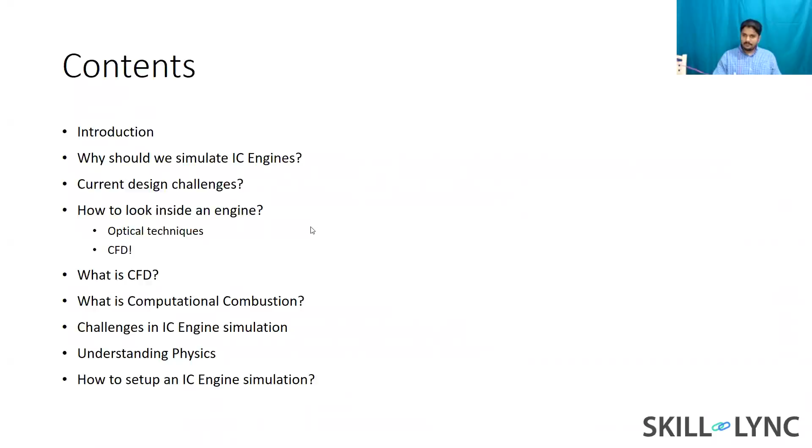So why is IC engine simulation required? Well, partly because IC engines produce emissions and they're not that efficient. So why are IC engine simulations required then? Why is that a solution? Well, IC engines are a device that have been existing for a while, correct?

Let me just get my microphone closer so that you guys can hear me. Like I said, IC engines are a device that have been existing for a while. So since it's been a while, there are a lot of engineers like you who have tried to optimize this system before and succeeded. Previously, this type of success could be attributed to very simple calculations. A very simple example is that the thermal efficiency of an engine is proportional to the compression ratio. I'm pretty sure you've all studied the Otto cycle, where there's a formula: 1 minus 1 by R power gamma minus 1. You don't have to know this formula, but basically the idea is when your compression ratio increases, your thermal efficiency increases, correct?

In fact, the variable compression ratio technique is completely based on that simple formula. I'm pretty sure you guys know there is a new technology called variable compression ratio. Though the concept is very easy and can be derived on a piece of paper, it's only been implemented right now.

There are a lot of other technologies which have been implemented, or are in the process of being implemented. These type of analytical work can take us far, but not really, really far. At some point you need a better vision, you need to see inside an engine. For that there are experimental techniques, but as I will show you, there are some bottlenecks to it.

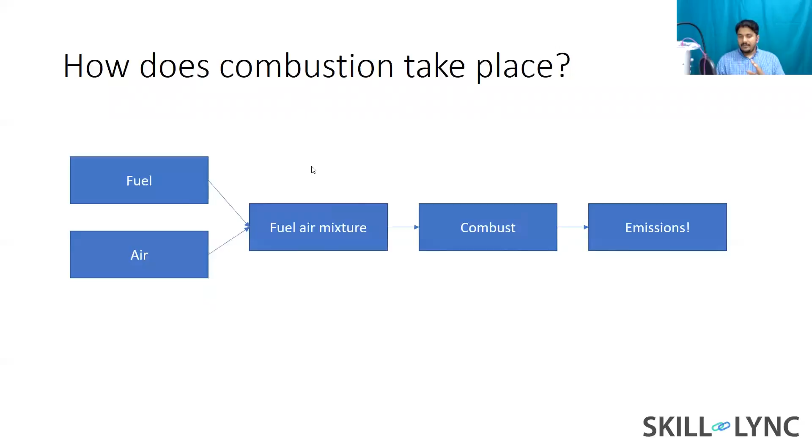In the simplified diagram, if you're able to optimize even a single system - meaning, for example, if you're able to optimize the process of creating fuel air mixture - that means you're taking a step forward towards optimizing an IC engine. I hope that makes sense.

For example, if you make the mixing process more efficient, you can get advantages in reducing emissions and gaining performance improvements. But what does making the mixing process more efficient even mean? Can anyone answer that question? How can you make the mixing process more efficient? What are some of the technologies currently available? Can anyone answer, please? It's a very simple question, so I'm hoping all of you can answer.

ECU, electronic control unit - how does it make the mixing process more efficient, Nirav? Fuel injection, okay that's good. Fuel injection definitely makes the mixing process more efficient because it helps in better atomization of the fuel. Harshit says more air and less fuel maybe? Not really, right - we're talking about the mixture, so even if your fuel amount or air amount changes, mixing is completely different.

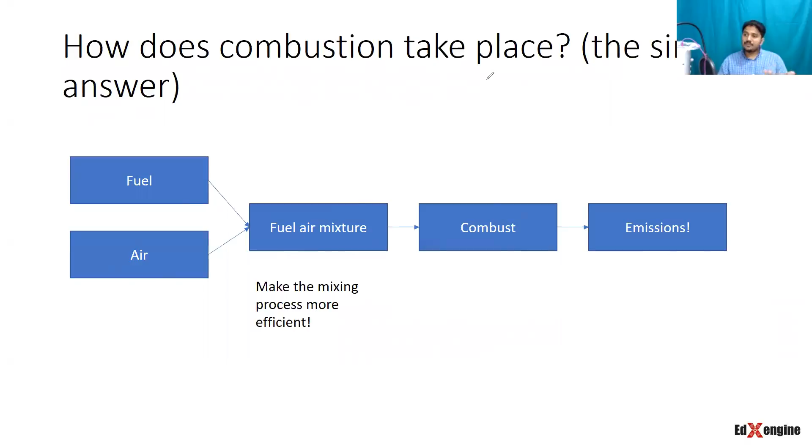Similarly with combustion, if you're able to make the combustion more efficient, then things will be better. But that's the question, right? Whenever you're talking about making things efficient, you always need to engineer the problem.

For example, say you're working with some type of system and you're trying to optimize it. The question is, when you're trying to optimize it, you need a performance metric. Say you're designing a vehicle and trying to optimize your suspension system. You can tighten the springs, modify your dampers, change your camber, caster, toe-in, toe-out, all that stuff.

But how would you measure the performance of the vehicle? There has to be a particular metric. What would that metric be? How fast can I complete a particular lap? That is a metric. So the metric you're looking for is time, correct? Time to finish a particular race.

But how do you put a metric for combustion efficiency? Can anyone answer that question? Neerav Vyas says, what controls this injection port? Neerav, maybe try to rephrase your question, type in a longer answer.

Harshit says compression ratio is a geometric quantity, right? Because it is a geometric parameter, it is just the ratio of volumes. How does that make your combustion more efficient? When we're talking about efficiency, isn't there something like 50% efficiency, 60% efficiency? How do you measure that?

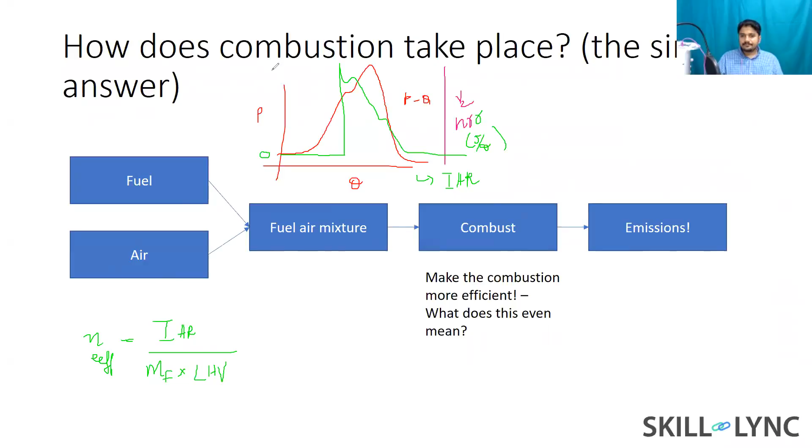All right, finally we have emissions. Emissions is basically something that is controlled by chemical reactions, and a sound understanding of chemical kinetics is required in order to completely understand how your reactants, which is air and fuel, are converted to products.

All right, so now the previous diagram, as I mentioned, is a simplified diagram. So now let's kind of build upon it, add more layers to it, to understand a much more detailed and complex picture of the IC engine combustion process.

So first, you need to make sure you have your fuel components, vaporization characteristics, and physical properties. Why is that important? You need to understand your fuel - for example, say you go to your petrol bank today, it is made up of thousands of species. What do I mean by species? Well, that refers to hydrocarbons like octane, alkenes, alkynes, and benzenes.

Aromatics - so your fuel is made up of all of these components. It is very important to understand what your fuel is made up of, because each component will vaporize at its own rate, which is what you call the distillation curve. So very similar to fractional distillation - you guys might have studied that concept. Basically, in fractional distillation, different hydrocarbons settle down at different heights because of differences in their vaporization characteristics. The same concept applies to your ordinary fuel as well.

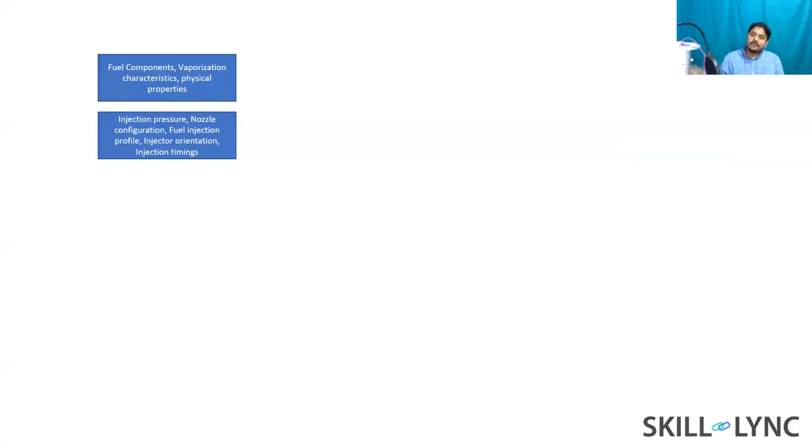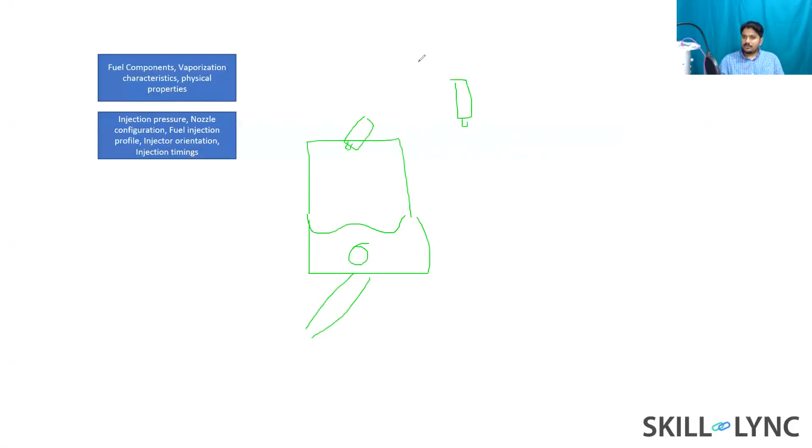Say you have an injector and you have to place the injector. For example, if this is your engine and say this is your piston bowl, okay, and this right here is your piston, and I have my connecting rod here. Say that you have a fuel injector - now, would the fuel injector be placed like this? Or would the fuel injector be placed like this? What is the right way? Can anyone answer this question? How do I decide which way I want my injector to be placed? Red one, why? Why is that?

So these are very practical questions that you can think about. The answer is, the fuel doesn't impinge on the wall. Well, in this case, don't you think the fuel is directly going to impinge because this is the shortest distance? Isn't the diagonal larger?

Ivanshu, what do you think about that? Mayank Yadav says it distributes in a better way. How are you saying that? The green one, as it will cover more area with the air inlet. Well, so that's the thing, right?

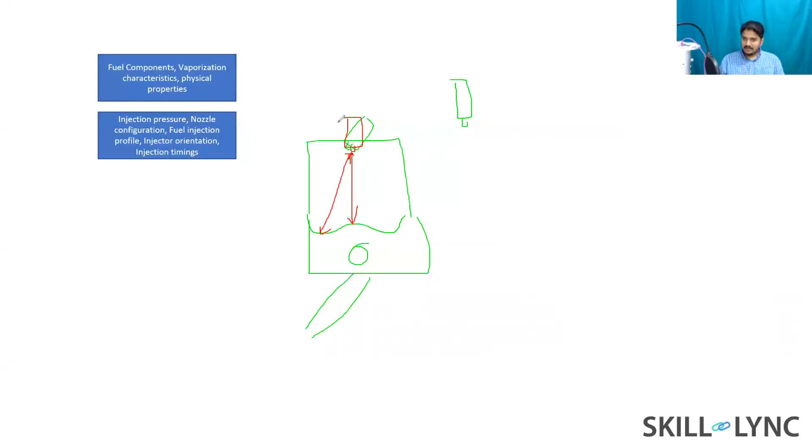So it depends on a lot of factors, right? If you think about it, the port design is something that you try to optimize. One of the things people do is, for direct injection engines, before the spark starts, your fuel needs to vaporize. How will the fuel vaporize?

Well, if you hit the wall directly, that's it. You forget the vaporization. It's all going to be liquid fuel, and your engine will basically generate a lot of smoke. So what should I do?

Well, I need to reduce the impingement, which means when the spray comes in, I need to make sure that it does not impinge. That is not the only criteria, but my parcels need enough time to basically vaporize, right? Which means, yeah, you can see that this is the longest path. But what I can tell you is, in this type of configuration, if you take the green injector, I can do a couple of things.

What I can do is design my intake port to be something like this, so my intake port and the fuel injector are aligned at the same angle. So if I measure this angle theta, my injector is also aligned along the same angle.

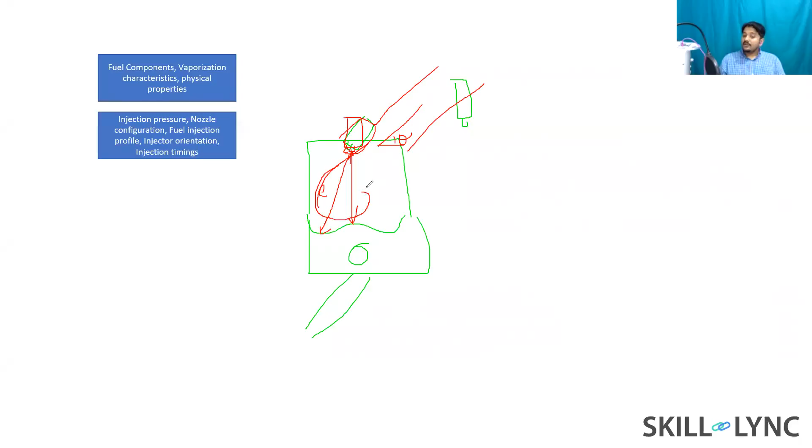So what will happen is, my fuel spray will come like this, and because of the piston shape, the air would force the spray parcels to take this path as much as possible. There is still going to be some impingement, but the bulk of your spray is going to take this path.

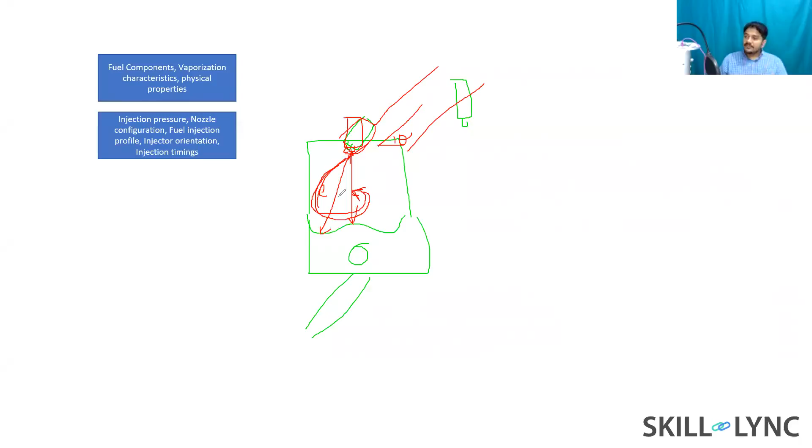And that is where the bowl design is very important. This will help you in atomizing the spray, right? So this is what you call a tumble port.

And this flow, this rotation, you can see that the air has a rotation about the x-axis, where x is pointing normal to the screen. So when you're looking at the screen, the x-axis is pointing towards you. This is basically tumble. So tumble is basically flow about the x-axis or y-axis, assuming the z-axis is the axis of the piston.

So this again, you can see that the concepts are quite simple. But so far, whenever I talk to someone, no one knows what tumble flow is. Hopefully now you can understand that it's a very simple design or flow methodology that you can use to make sure that your fuel doesn't hit the wall directly.

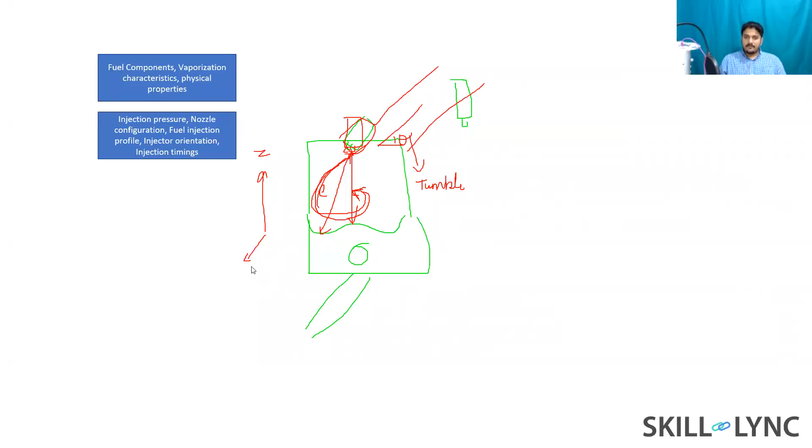Harshit, can you explain again? Yeah, sure, no problem. So what I'm saying is, let me see if I have a video for this. Just a second. I'm just going to stop sharing my screen. I'm going to see if I have my simulation video for this. Else I'll just show it to you.

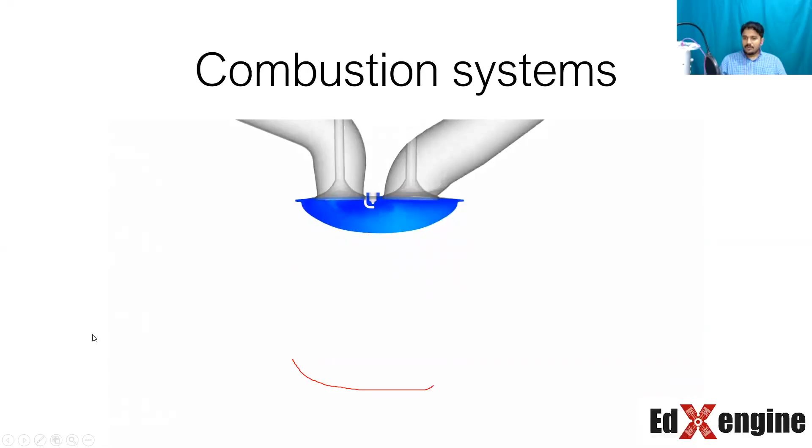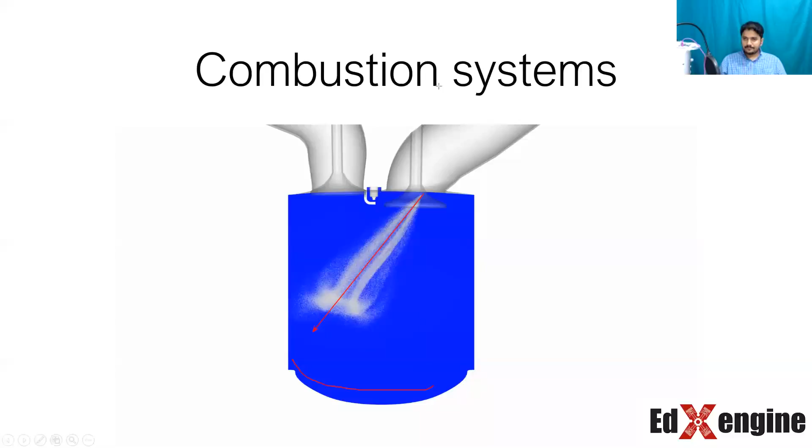It's going to be quite easy to visualize in the next slide, where I'm showing the spray again, but in white color. You can see that the spray comes in, right? So this right here is the axis of the spray. And you can see that my intake port, if I use a different color, kind of has the same angle, almost, not exactly, right?

So what this is going to do is help you turn the flow like this. And that is called tumble.

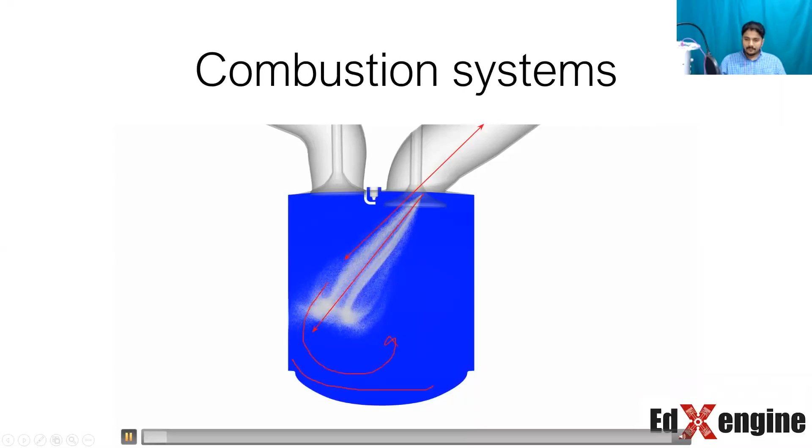So if I play the video again, you can see that it comes in like that, but there's some amount of rotation like this, and all of your spray is vaporized and combustion takes place. So that's your flame front propagating. So this is one of the simulations that we ran.

And I hope Harshit, this kind of clears things up. So this is a tumble port. In this case, the simulation that I ran, this is what you call a tumble port, TP.

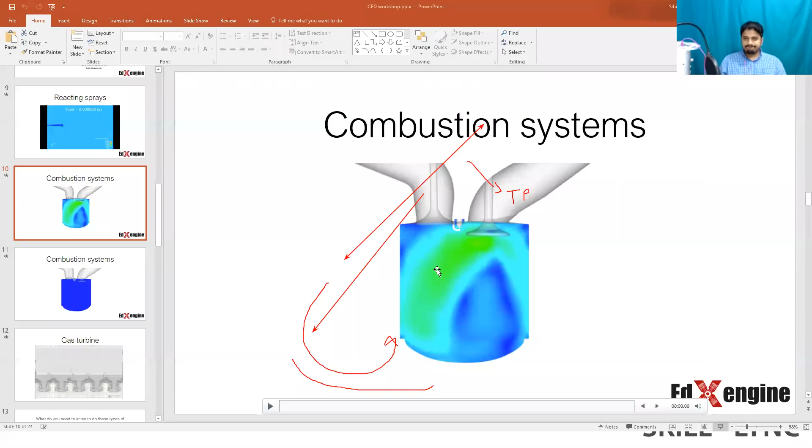So the other thing when we talk about fuel is to talk about the fundamental physics. You need to understand how the fuel vaporizes, how the fuel breaks, because that will help you design your injection systems and your combustion chamber. Your fuel comes in, and the objective is to break it up efficiently and vaporize it as fast as possible, in a controllable, repeatable manner. So you need to spend time understanding the fundamental fluid dynamics of these injected fuel droplets.

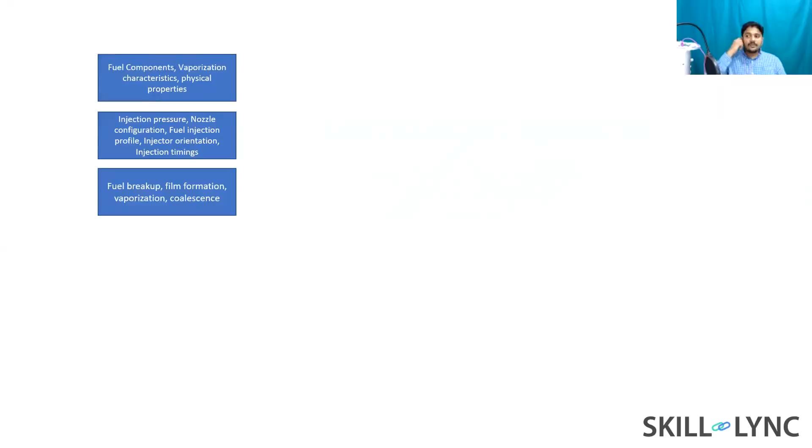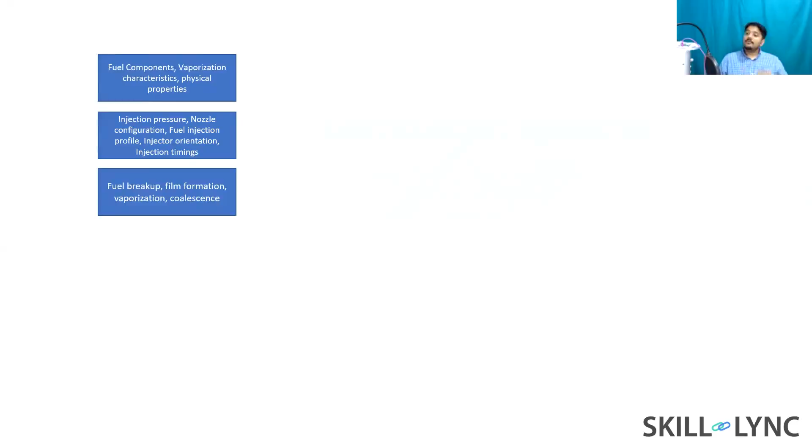For that, people routinely study fuel breakup and film formation. Film is basically when the fuel hits the wall and forms a wall film. Then there's vaporization, and there are so many factors involved. If you remember from the previous video, the spray was represented by really small parcels. How do those parcels vaporize? What happens if there is film formation, how does that vaporize? There are so many things you need to think about, and only then can you understand the entire spray process comfortably, so you can design something to meet a particular limitation if you find one in the first place.

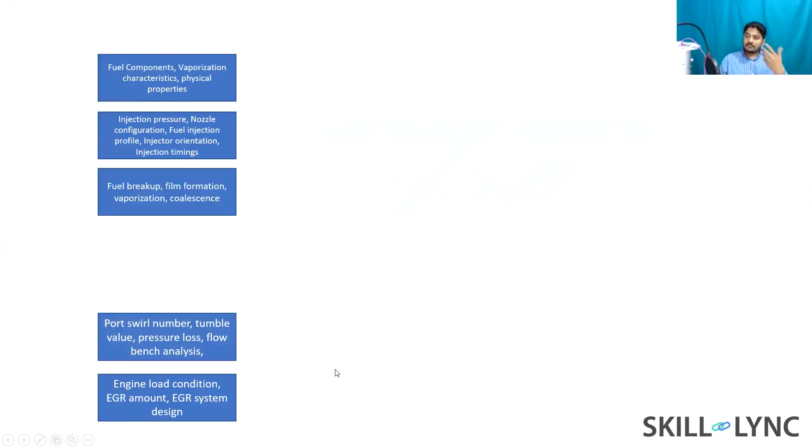How about the intake side? On the intake side, there are so many decisions you need to make. Do you have an EGR, which stands for exhaust gas recirculation? Is there an intercooler? Then how does the air, or air plus EGR mixture, come inside the engine? Is it a helical or swirl port? Is it a tumble port? What type of port is it?

That is why people look at something called flow bench analysis, so that experimentally they can figure out the angular velocity of the fluid as it comes through the intake. People can actually measure that.

Then you look at more additional concepts, like valve dynamics. Your valve is what allows your air-fuel mixture to come inside if it's a carbureted engine, or just allows air to come inside if it's a direct injection engine. So the rate at which your valve opens and closes, and the valve timings, are crucial, because that will limit the amount of mass that gets trapped, and that will also determine the amount of blow-by.

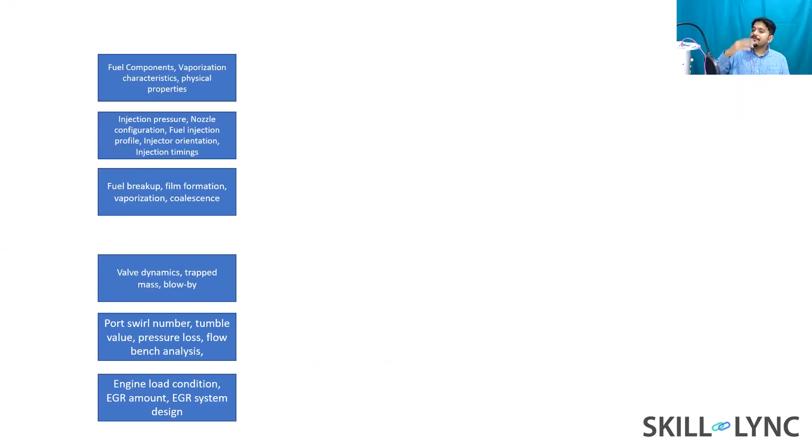Blow-by would basically mean leakage. For example, if the valve is closing too late, as the piston is moving up, some amount of charge can get pushed back through the intake, and if your intake has small leakages, you can have some fuel going out of that. So you need to understand that, because if you're fixing any issue in that system, you are improving the overall engine efficiency.

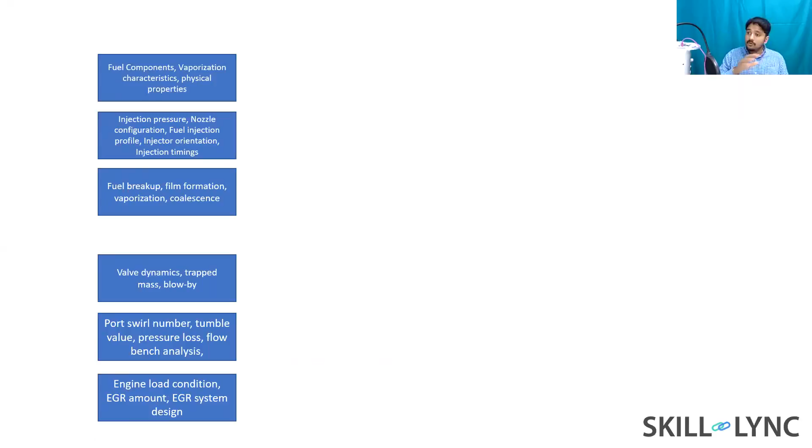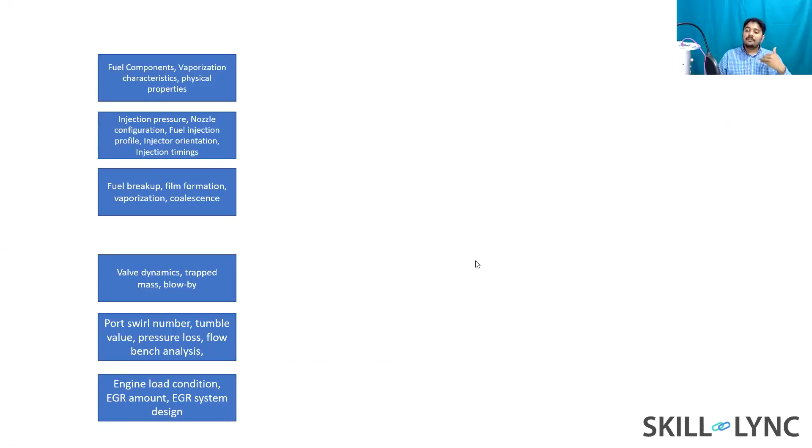So our concept is very simple. Previously, we knew only 5 blocks that determined how engine combustion takes place. Now we already have 6, and we have a few more. The more the number of blocks, the more the areas where you can find problems, and you can come up with some solution. You're increasing the probability of finding a solution by understanding more about the subject.

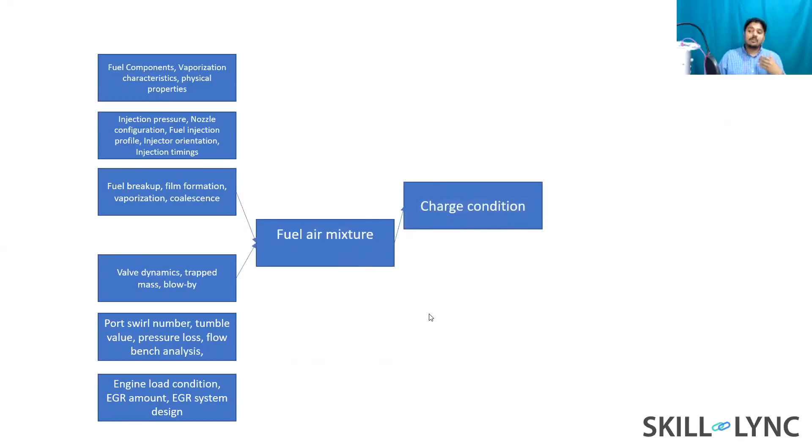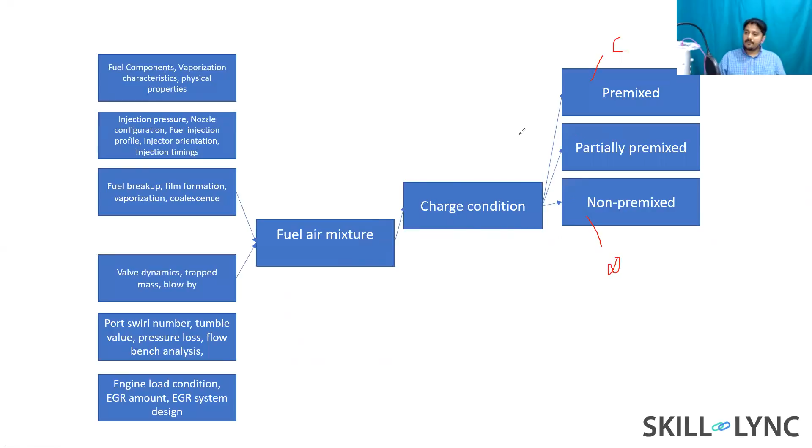Then comes your fuel-air mixture, which is what you call the charge condition. You quantify it as premixed, partially premixed, and non-premixed. An example of a premixed engine is your carburetor engine. An example of a non-premixed engine is your diesel engine. And an example of a partially premixed engine is your gasoline direct injection engine, which we saw today a few minutes back. Why do we care what type of mixture it is?

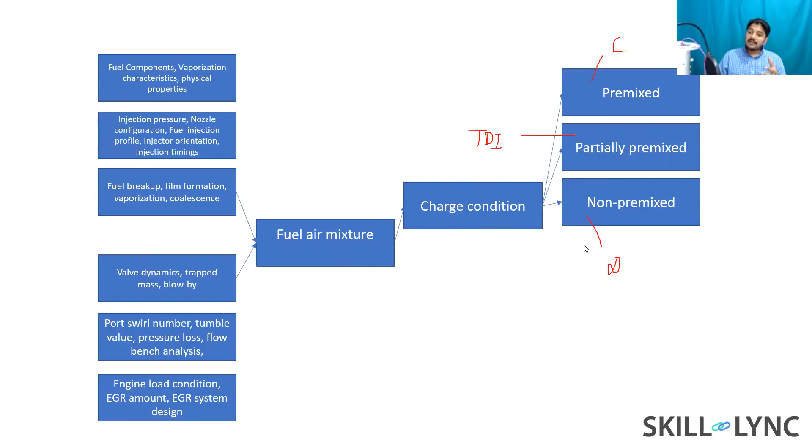Because it turns out, depending upon the mixture, the chemical kinetics, the chemical pathways that your system takes, are going to be different. Meaning, premixed combustion versus non-premixed combustion would result in totally different emissions. It doesn't matter if your equivalence ratio is the same, even if your chamber conditions are the same - if it's premixed versus non-premixed, the combustion pathways, your reaction pathways, are completely different. This is called fuel chemical kinetics. People spend a lot of time understanding this, and you need to also try to quantify how the combustion takes place.

So that is why heat release rate, combustion efficiency, temperature distribution, and local equivalence ratio come into play. In addition, you can get performance improvements by understanding wall heat transfer - meaning how much cooling should I provide for my engine. If I provide excess cooling, I'm unnecessarily wasting combustion energy. If I provide less cooling, I'm risking damaging my engine due to thermal damage.

So many considerations, and this is again at a grand scale compared to the previous diagram - this is a much more detailed diagram which offers insight into what's happening inside the combustion chamber. But this is still a relatively simplified diagram. There are so many blocks. For example, your premix, non-premix, and partially premix can be further subdivided based upon the amount of turbulence you have, and things would get more mathematical and analytical at that point. But trying to get that entire picture is what an engineer should strive for as much as possible.

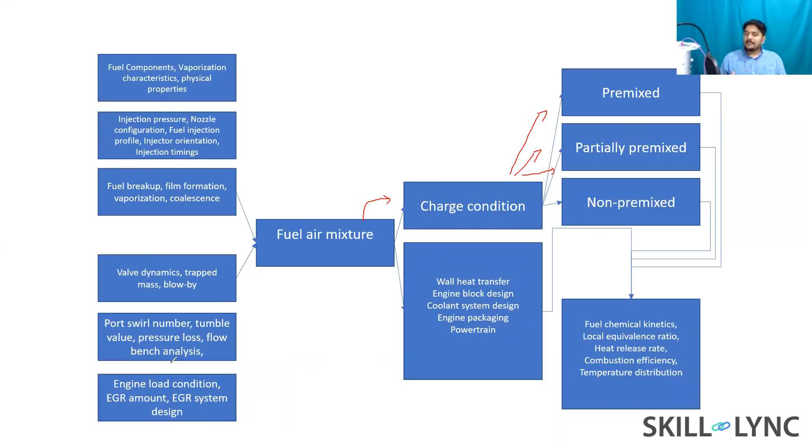Now think about the scenario where you wait infinite time in the same cold room, and let's say there are no windows in the room. You wait for infinite time - what's going to happen? Everywhere the temperature is going to be uniform, correct? That is what you would call a premixed case. And partially premixed is something in between. I hope that makes sense. Let me know if you have any more questions.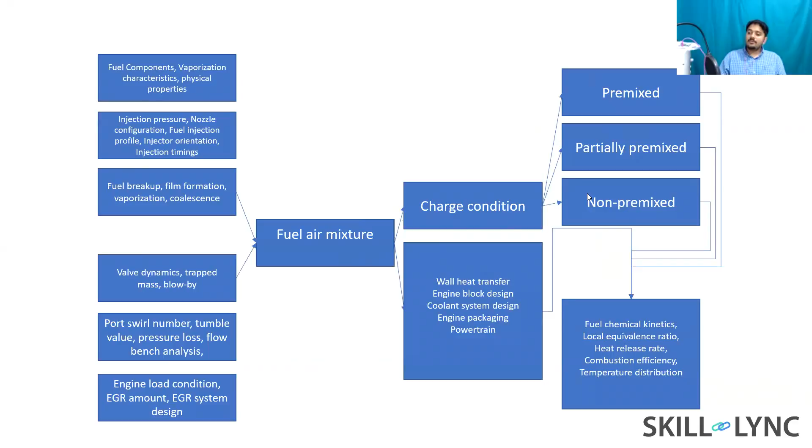All right, so let's take a look at the first experimental technique that I wanted to talk about, which is called Schlieren imaging or shadowgraph.

Can you give me an example of this? For which one are you talking about, Arshit? For premixed, it's going to be a carbureted engine. For non-premixed, it's going to be a diesel engine. And for partially premixed, it's going to be the tumble engine which we looked at - the engine simulation that I showed you earlier. This is an example of partially premixed because the injection takes place just a few degrees before combustion takes place.

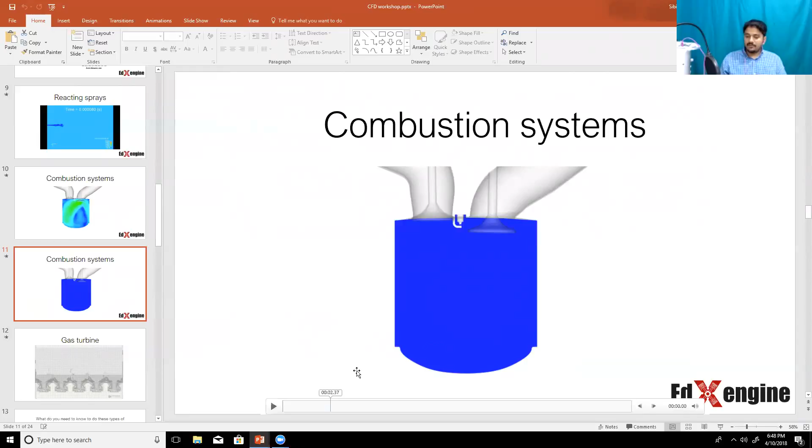What about PFI? PFI is premixed. You're right, so PFI is a good example. GDI would be partially premixed depending upon the start of injection. So for example, the tumble port that I talked about, that I showed you, is actually GDI.

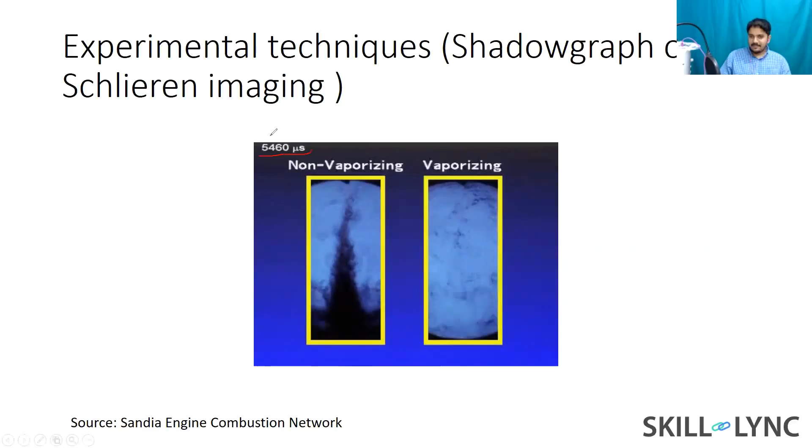All right, let's take a look at what's going on here. You have something called the time here. Look at the time, this is just ridiculous, like 5460 microseconds. That's really, really fine time resolution, right? Because these processes take place very, very fast. So in 5460 microseconds, your fuel is vaporizing. That's really, really fast.

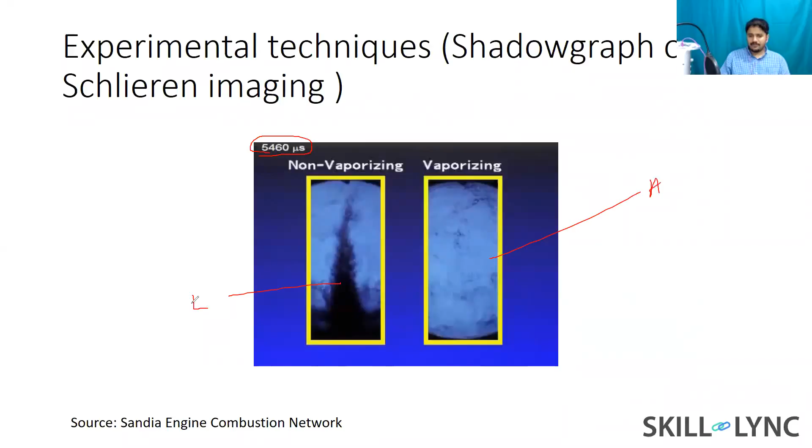So a shadowgraph is a technique that helps you differentiate density values. Dark, anything that appears dark, is having higher density. So dark is liquid, and anything that's light is going to be having a lower density. And in this case, that is going to be your air. So this is going to be your fuel, and that's going to be your air. Shadowgraph or Schlieren imaging is a technique that helps you visualize this.

And then in this case, the reason why the fuel is dark all the way - for example, here the fuel is all the way dark, but here it's light - that's because this is a vaporizing spray, meaning the ambient temperature is around 800 Kelvin or maybe higher, so let's say greater than 800 Kelvin.

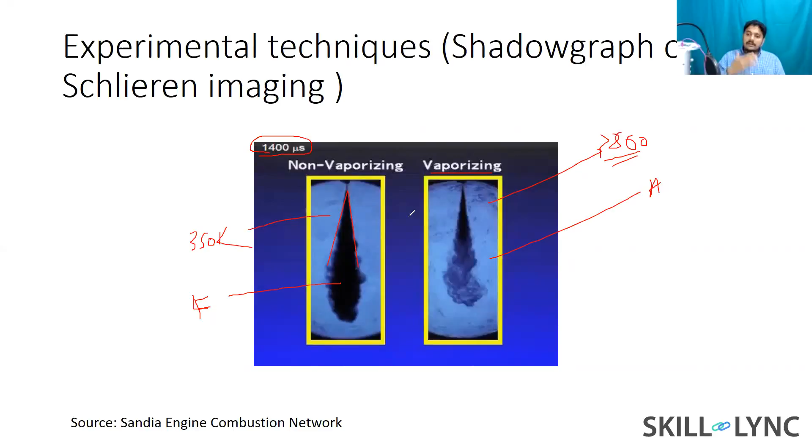If you're interested in this type of data, you need to refer to Sandia. Sandia National Lab - N stands for National and L for Lab - is a research institute in the US. They have a program called the Engine Combustion Network, and part of which they're conducting and collecting really high quality data about sprays. The reason why they're doing this is to support computational fluid dynamic research that is being done all over the world on this topic.

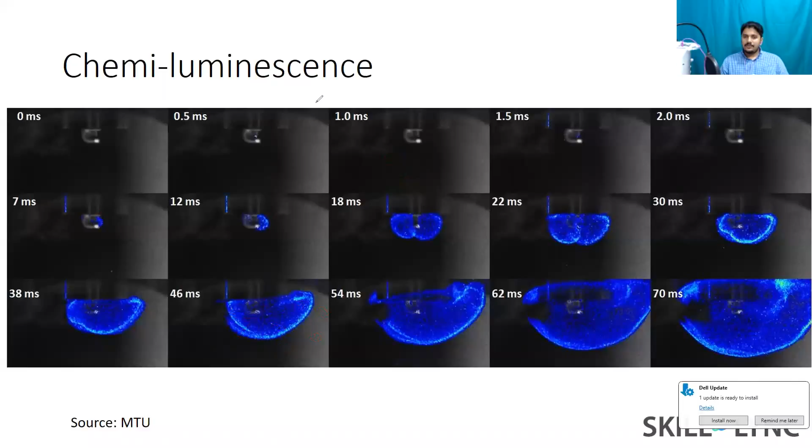What are the other devices? Well, the other devices are your regular temperature and pressure sensors. These give you information at a single point and as a function of time. So these are very useful as well.

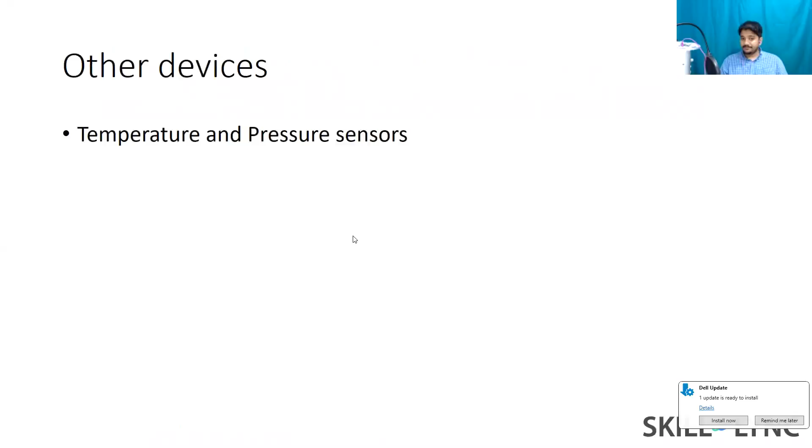Now, as far as merits and demerits of experiments are concerned, I think we know it very well. The data is really high quality, but the problem is low temporal resolution. For example, if you're studying combustion in a box, you can get data quite accurately. But what if you're studying combustion in an actual engine? You need really complex equipment to get high temporal resolution, meaning the data should be taken quite frequently.

The problem is you're eventually going to destroy that experiment, because if you're putting an optical access, that's what you call a transparent combustion chamber engine. The engine is eventually going to get damaged because the optical access means you have a sapphire glass or something like that, and the glass is going to break at some point.

The setup is very complex, not easy to set up these experiments. In fact, people spend their entire PhD just to set up the experiments and maybe take a little bit of data. Usually there are two or three PhD students that work on the setup, take some experiments, and then graduate. And it's prone to errors, which is why it takes as much time as a PhD, because you make a lot of mistakes, need to rectify them, fix the issues, and move on. Finally, it's very, very costly.

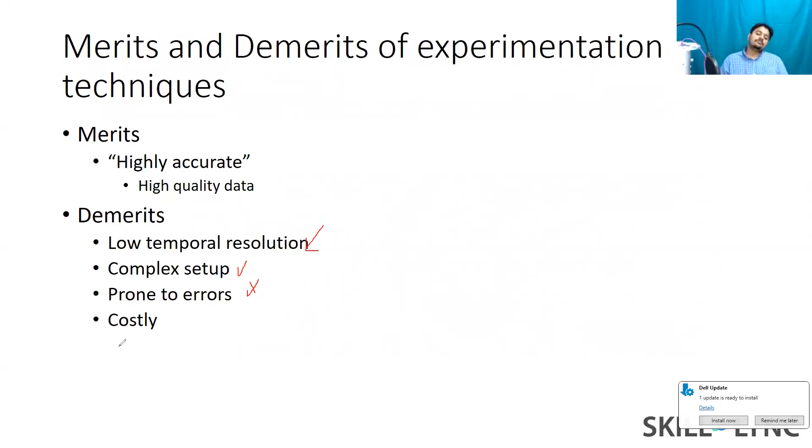With IC engine simulations, it's cost effective, meaning you just need computers which are very cheap nowadays. You can get very high temporal resolution and collect as much data as you want. The problem I see nowadays is you need highly skilled engineers. I'll show you a simple IC engine setup right now, and you'll see that setting it up the right way is actually complex. You need a very good amount of application knowledge, and CFD and combustion expertise. So let's take a look at a live demo.

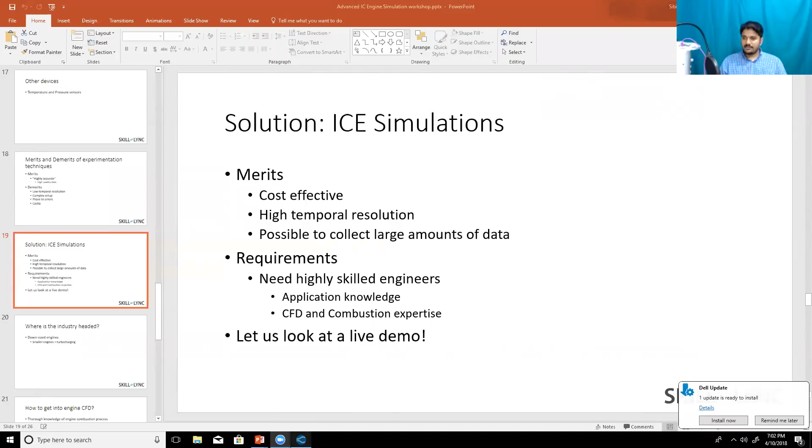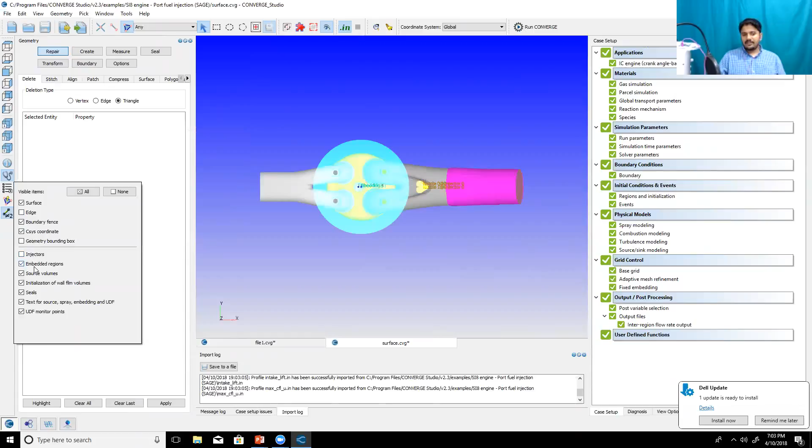So here, what I'm going to do is open up something called a port fuel injection engine. This is something that I set up, so I'll show it to you and you can understand what's going on here. This is a production engine, meaning if you know someone at General Motors or Ford, and you show them this model, they would recognize it. It's very similar to a model they are working on.

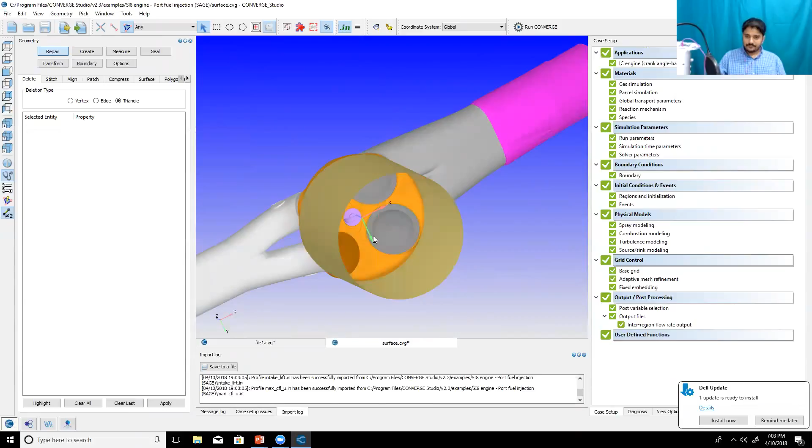It is so detailed. For example, here you can clearly see the spark plug, the valves — all the geometry is quite detailed. This is a PFI engine, and you can see the provision that we have for the injector. If I hide the surface, you can see the detailed flow path that is clearly being captured. And if I enable the edges, you can get some context.

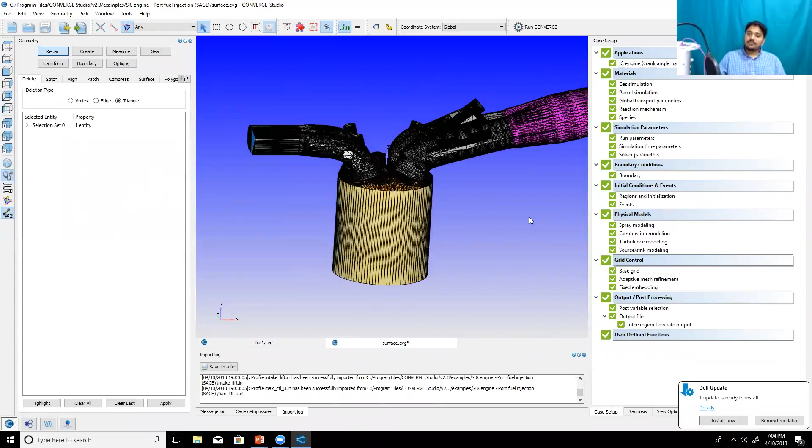Okay, so what does it take to perform an IC engine simulation on this model? First of all, how did I get this model? It's coming from SolidWorks. When designing this engine, we designed it in such a way that we are taking only the flow volume. For example, if I put it in front view like this, the actual engine — let's say this is an air-cooled engine — it's going to have fins, correct? It's going to have fins like this.

And then for all the valves, you'll basically have a valve block. For your exhaust, there's an outer insulation layer, and your tailpipe would take you to the catalyst. Sorry, this is the intake side, so there's no catalyst. On the exhaust side, this leads to your tailpipe with a muffler or whatever, and then finally your tailpipe.

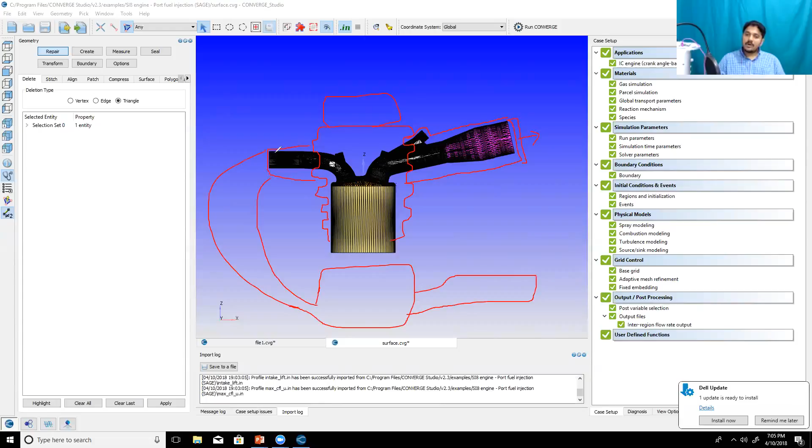But here what we're doing is we're not doing any of that. Since we're trying to simulate only the fluid inside the port, I'm just modeling that. That's what you call the wet volume. What engine is this? Well, this is a 4-stroke PFI, port fuel injected spark ignited engine.

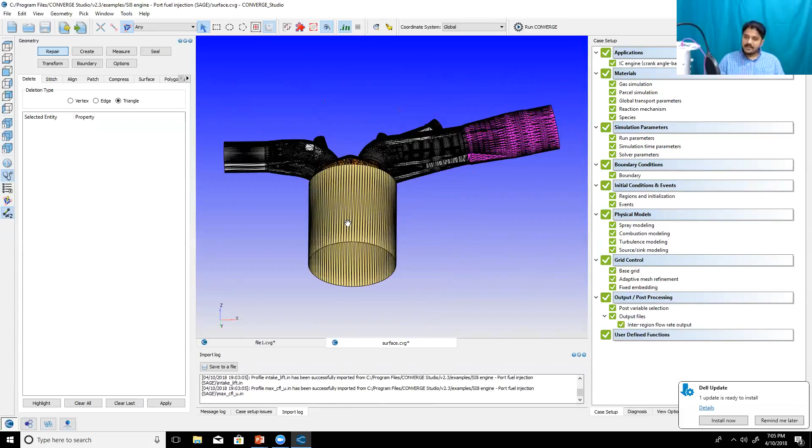It's a made up engine, but made quite accurately. That's why I said this is a production quality engine, meaning it has all the geometric features of a production engine that you might encounter in the future.

Have you done meshing on the model? Well, this is not meshing, this is just the format. So this is a stereolithographic model, an STL file, which basically preserves the geometric features in terms of triangles.

So what I've done here is, first step is to break up the model. Let me display all the parts into boundaries. So I've taken all those triangles and grouped them into boundaries so that I can assign boundary conditions, because that's what you do in CFD. And then I also assign the initial conditions accordingly.

So the software I'm using to do all of this is called Converge Studio. Converge is a very popular IC engine simulation software, and it's used by pretty much all the OEMs you can think of that makes engines.

So here, let me walk you through the setup part. The first thing I need to do is select my fuel. In this case, I'm selecting IC8H18, which is gasoline or isooctane, as my fuel species.

How do you get boundary condition parameters? I'll talk about that. For reaction mechanism, I'm selecting a particular reaction mechanism, in this case called the JobPRF reaction mechanism file. This mechanism file tells you how the reactions take place depending on different temperatures and pressure, what activation energy is required, what the pre-exponential factor is, and what the temperature exponent is.

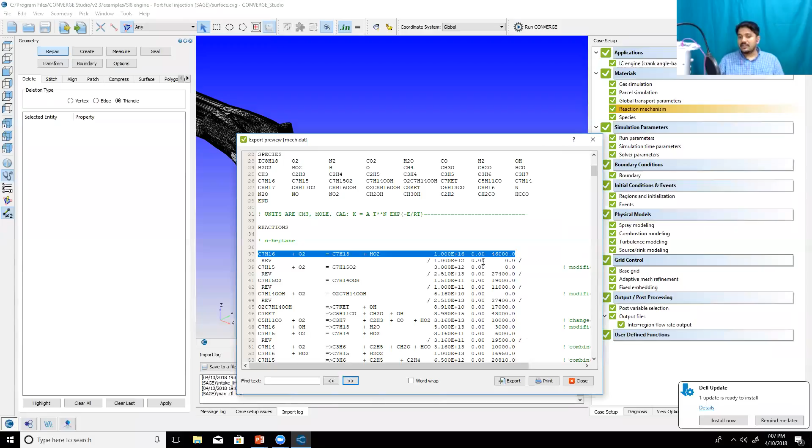If you know what the Arrhenius rate law is, these are basically the coefficients of the Arrhenius rate law. If you don't know what that is, don't worry, it basically deals with how fast a chemical reaction takes place. I give this reaction mechanism, which you can download from websites of universities like UC Berkeley, MIT, KAUST University, and so on. Selecting this mechanism file is itself a very big step. If you select the wrong mechanism file, one that doesn't match your fuel, you're going to get wrong results.

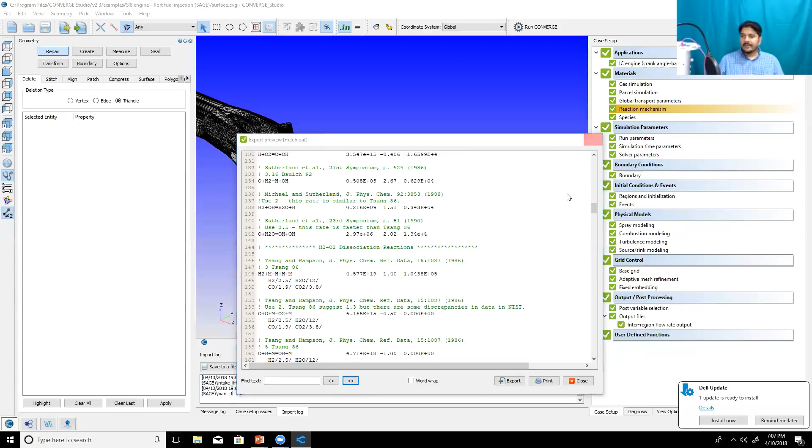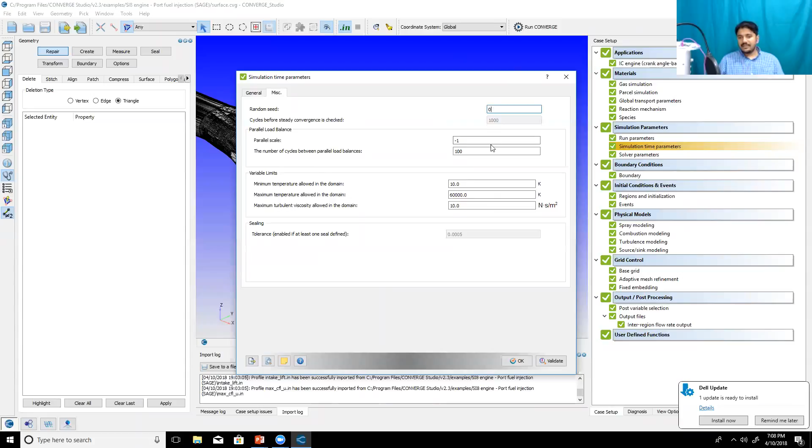Then for simulation parameters, I'm starting this just when the spray starts, and running it until the exhaust valve opens. I set up my time step parameters, again these are all CFD specific: time step, the CFL number, which is called the Courant number. I'm setting up my Courant numbers and a bunch of other parameters specific to Converge.

So then let's talk about boundary conditions. For boundary conditions, what we need to do is, for example, if you take the piston... looks like there's a question.

So what is CFD? CFD stands for computational fluid dynamics, Harshit. It's basically a technique that helps you simulate fluid flow using a computer. Does that make sense, Harshit?

Neerav, which software are you using? I'm using a software called Converge CFD.

Let's talk about the piston and its boundary conditions. In the case of the piston, we're basically saying it's a wall boundary and it's a translating wall. The surface movement is a moving surface because it follows the piston motion. When I select this option, Converge is going to use a slider-crank mechanism in the background and run the entire simulation automatically.

Is it different from Star CCM? Yes, it is different. You can think of Star CCM as the BlackBerry of simulation tools, and then Converge came in like the iPhone and replaced it. Star CCM was very popular and used in all the companies, but Converge came in and replaced pretty much everyone. Any OEM, any company that makes engines, is using Converge nowadays for simulating IC engines. That's why Star CCM's parent company, CD-Adapco, is no longer there, it got sold to Siemens. Not sure if you've heard of that. So that's basically it.

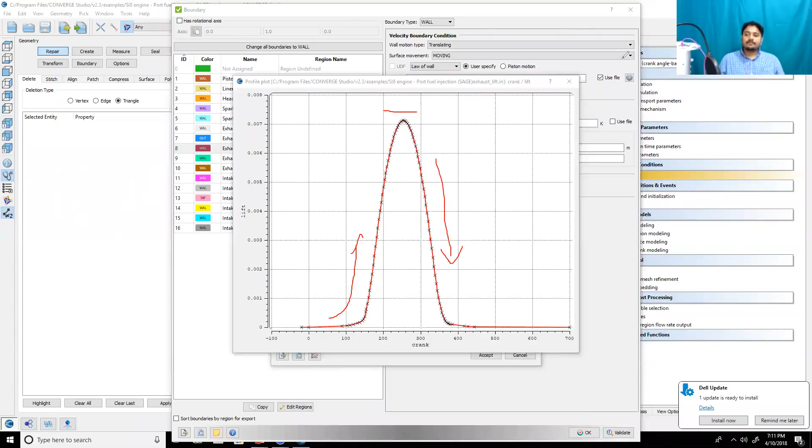For example, let's take a look at the exhaust valve. For the valves, I have a particular profile, which can come from multiple things, you can generate it from CAD or from a multi-body dynamic simulation. This is when the valve starts opening, this is the maximum lift position, and here the valve is opening, reaching maximum lift, and then closing down here. This profile and the starting and ending points are quite crucial, you need to give it correctly.

You follow the same process for the intake as well, and that's basically the boundary condition setup. Again, I'm cutting down on a lot of details, if there's something you want me to talk about, just let me know.

Then comes the really complex modeling process, the spray model. I'll just tell you what models I've used so you understand how complex it is. For parcel distribution, I'm saying it needs to be uniform, and for turbulent dispersion I'm using the O'Rourke model. For vaporization, I'm using the Frossling model, and for the evaporation source we set a flag called 0, which specifies source species. It might sound like I'm just reading the screen, but not all of these decisions have been made carelessly, I'll explain as much as possible.

First of all, simulating the entire spray, simulating the atomization event as-is, is impossible when running it within an IC engine simulation. If you're doing it separately you can, but within an IC engine simulation it's going to be impossible, at least for the next 5 to 6 years. Why? Because atomization itself is a complex process. People have simulated atomization alone, and the amount of computing power required is unbelievably crazy, you need a minimum of 200 to 300 million cells, that's the mesh density needed to capture atomization accurately or close to it. On top of that, with combustion and turbulent flow involved, it's just completely impossible.

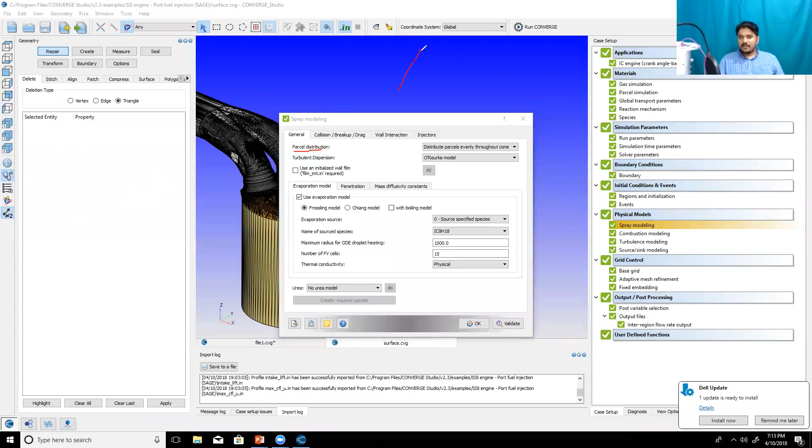So here, if I actually enable the injector, you can see that cone, right? That is what you call a spray cone. That is inside that cone, injection will take place. So we are saying that we are going to be distributing parcels evenly through this cone, all right?

And when the flow is turbulent, your spray velocities are going to be affected by this turbulence. So you have something called your turbulence governing equations, your K and epsilon equations. They have a source term. This source term is going to basically affect your parcel velocities, and that will affect its drag force, that will affect its vaporization characteristics, everything.

And here we are using something called the Frossling model. What does this model do? Since I have a sphere, as vaporization takes place, my sphere becomes smaller and smaller, correct? So what I can do is I can basically solve this heat transfer problem, and I can get the expression for dr by dt, which is basically saying how much the radius drops as a function of time. Because if I know dr by dt, I can compute dm by dt, right? Fairly straightforward. So dm by dt basically tells me the vaporization rate. And to capture the vaporization rate, Frossling basically proposed a formula, which is what we call the Frossling model. So understanding all of these terms in this level of detail is very important so that you can use it carefully. Else you'll just be randomly selecting models, and most likely it will result in an incorrect simulation.

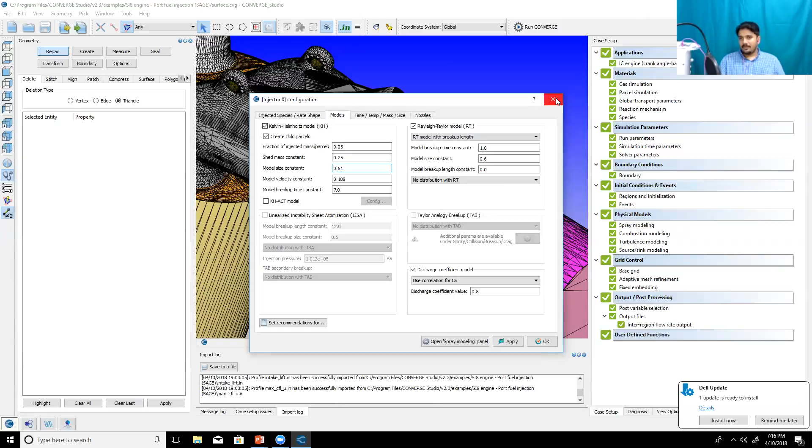All right, finally, second is combustion. So in this case, as I said, we are using that reaction mechanism. We are using something called the detailed chemical kinetics solver.

So finally, we have turbulence and spray source. Source is basically used to model the spark, right? Since we are using the spark plug here, we are basically saying that when the spark fires, it's going to inject a large amount of energy near the spark, and that is what is going to cause the combustion process to take place.

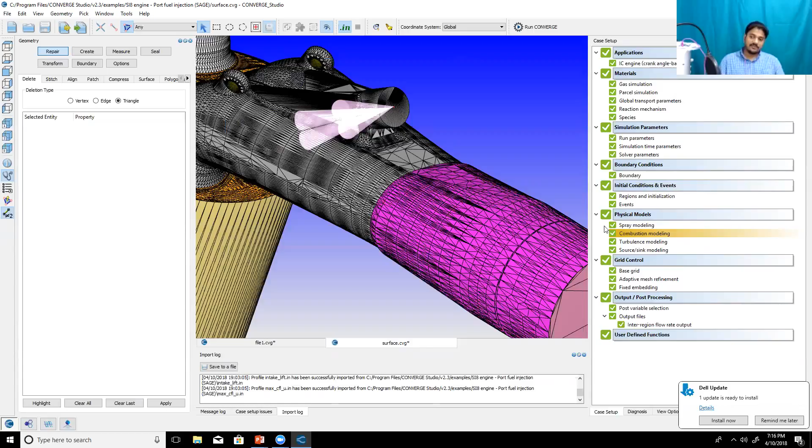And finally, you have to set up your computational mesh. So I'm using a base grid of 4 millimeters. I'm using a technique called adaptive mesh refinement. And I'm also using fixed embedding. Fixed embedding basically says, wherever I have this shading, the pink shading, I basically have a smaller mesh. I'm trying to resolve the mesh over there.

So when you set up all of this, you need a large computer to run this. When I ran this simulation, I was running it on a 16-core machine with 96 GB RAM. That is the amount of computing power that you need to spend. But when you do that, the results can be quite interesting. So let's take a look at the results.

Himanshu, refining the mesh. Himanshu, why don't you finish typing your question?

So let's take a look at the events one by one. So let's start with the intake first. And let's look at the spray simulation alone.

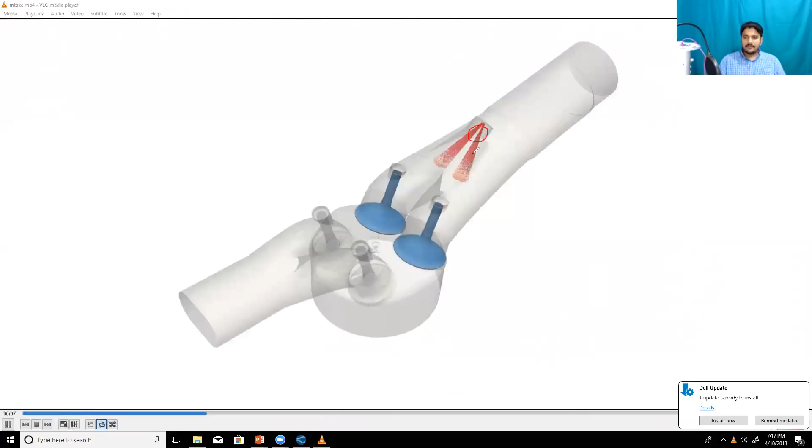So here what's happening is the fuel is going to come in from here. The fuel is colored by velocity. Red is high velocity, blue is low velocity. When the spray hits the valve, the velocity becomes smaller. But then immediately when the valve comes in, the fuel is just going to get sucked in, and you can see all the turbulent and chaotic motion that's taking place. And then slowly your valve is going to close. And when the valve is going to close, some amount of fuel is going to get trapped in the intake port. And then you can see that here, your fuel has vaporized.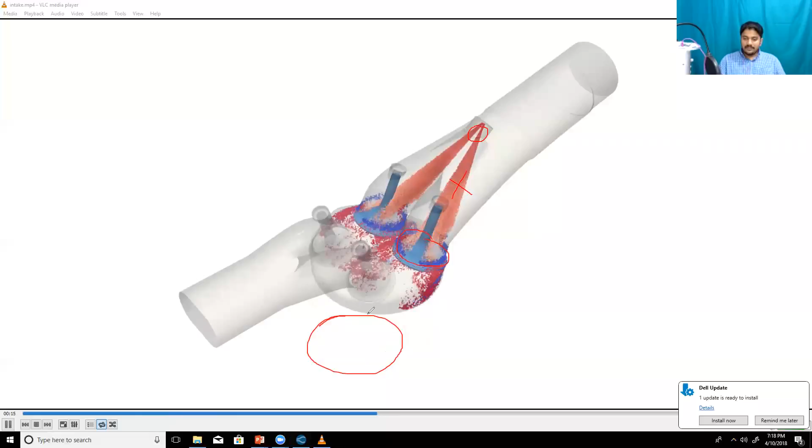Almost. So let's play the video one more time. Just pay attention to it one more time. So fuel is coming in. It's going to hit the valve first. And when it hits, the velocity is going to become zero, which is indicated by the blue color. And then everything is getting sucked in. Your piston is still coming down.

And then you can see that slowly your parcels are disappearing, right? It's disappearing because that's your vaporization. We basically stopped the video quite early, but let me just pause it here really quick. By the time we come here, you can see that you still have a long way to go. For example, from here to here, we still have a long way for the piston. And by the time, everything will be vaporized. So this is the quality of simulation results you can get if you do it correctly.

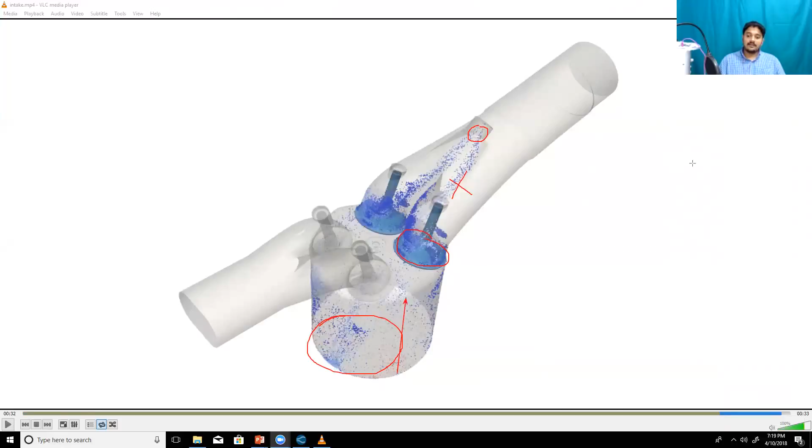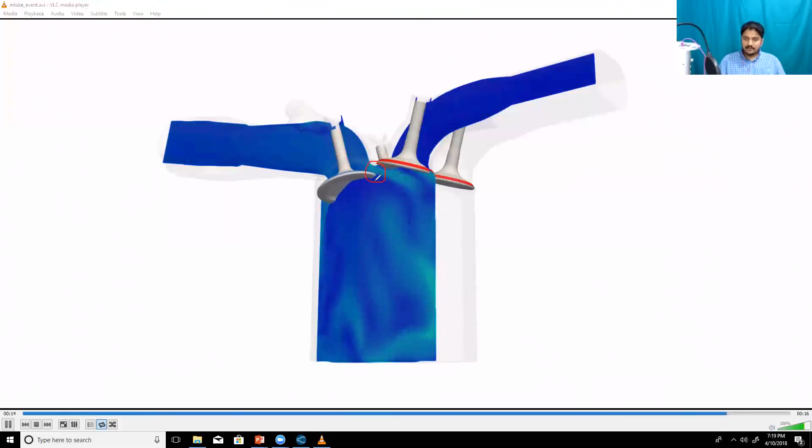So let's just close this. Here what we are looking at is the intake event. So when the valve opens, you can see how the intake jet is being resolved. As the valve opens and closes, you can see that the velocity just drops. Initially, the velocity is very high, indicated by the red color. That is your maximum velocity. But as the valve opens, that velocity reduces.

This velocity jet is what is causing the turbulence to exist in your combustion chamber, and this turbulence is what helps your combustion take place successfully. Now, this entire process is happening very, very fast, but with a simulation, you can actually see it in a lot of detail, which is not possible using experiments.

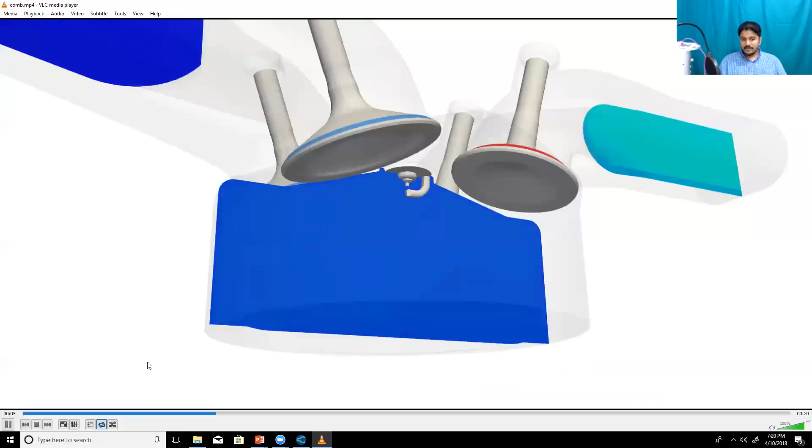Okay, so finally let's look at combustion. For example, here we are in the process of compressing the mixture. Compression is taking place. Let me just pause. There we go, so that's your spark. And look at it, your flame front is asymmetric, right? Just like we saw in the chemiluminescence experiment. You're able to capture that because you're also including a turbulence model.

Does flow separation occur at point of max velocity? Not always, right? But in this case, near the valve, there's going to be flow separation because of the geometry.

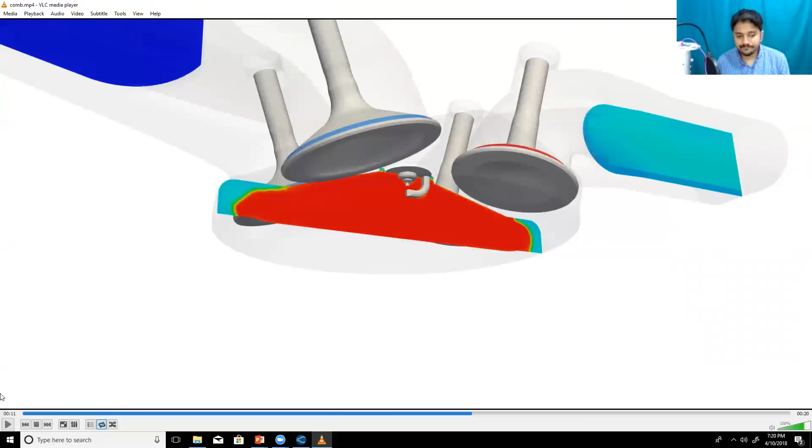So if I continue playing this video, you have your expansion stroke, and your temperature is slowly dropping because of heat transfer and volume expansion.

Okay Harshit, I have seen engines that mix air and fuel together while the piston goes down. Well, that is kind of what happened in this engine also.

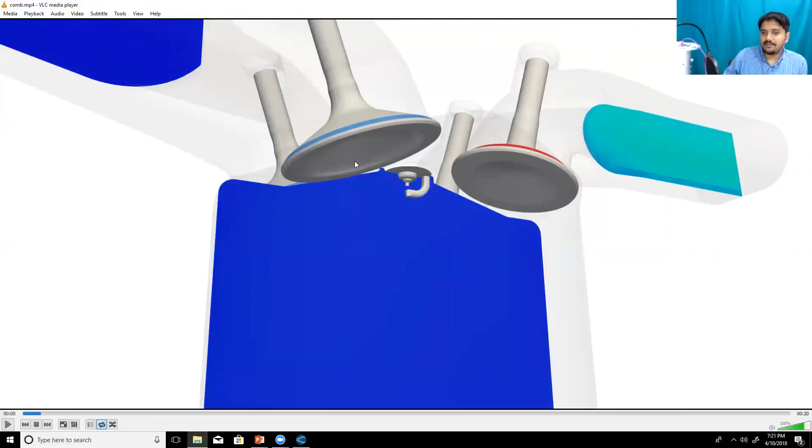So for example, if I play the first video again, you can see that that's what's happening. As the spray comes in, initially your valves are closed. That is why there's a lot of film formation. But then when the piston is going down, the spray is coming in, so you can see that the volume is continuously increasing, which prevents the film formation. You still have some film, but that's fine, it's going to vaporize because you have a lot of time. You're just now starting your compression stroke; before this, everything needs to vaporize. Does that make sense, Harshit?

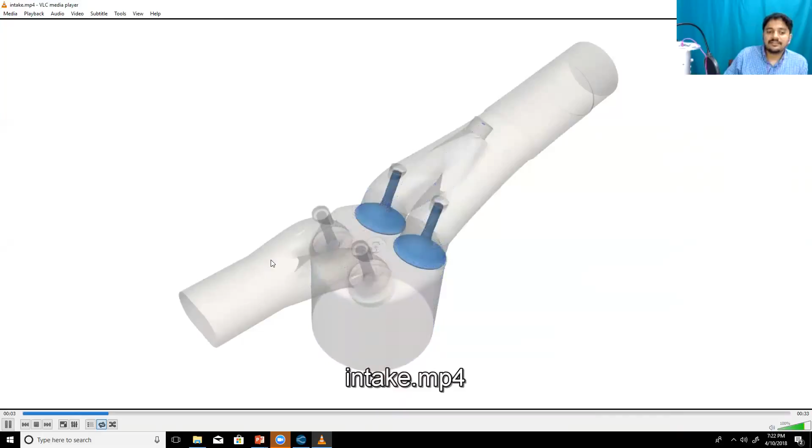Okay, so what do you guys think? Any comments regarding the simulation?

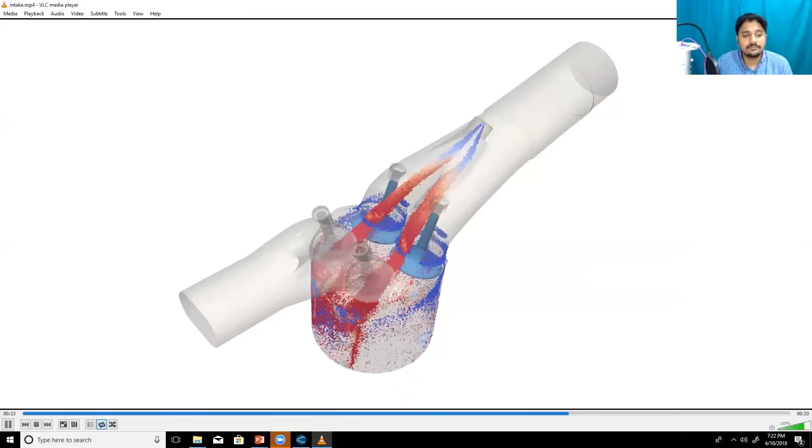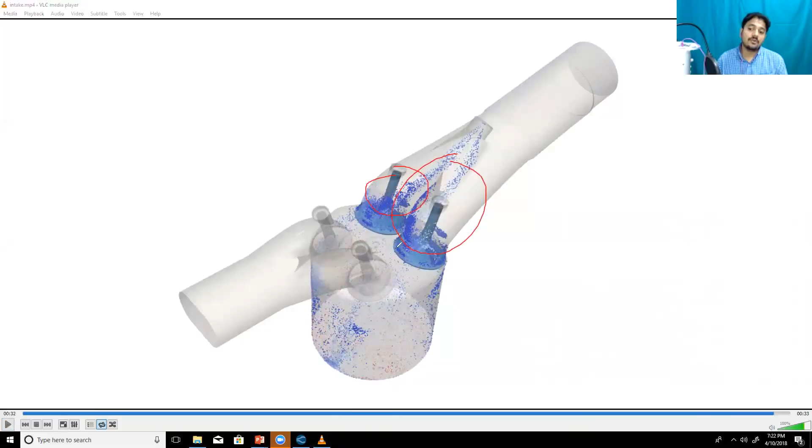The fuel is mixing before the valve is opening. Yes, that is the characteristic of a port fuel injected engine. Let me just pause the video right there. For example, Harshit, if you see here, in a port fuel injected engine, there is a large amount of spray parcels trapped inside the valve, correct? This is basically very common in a port fuel injected engine, and this is going to come inside the engine during the next cycle. So out of your injected fuel, say you have 100% fuel, let's say 5% is trapped inside your port. Only 95% comes in during your first cycle. But then during your second cycle, this 5% will first come in. So inside your engine, you will always have 100%, and you will always have 5% in the port. So the system kind of reaches an equilibrium at that point.

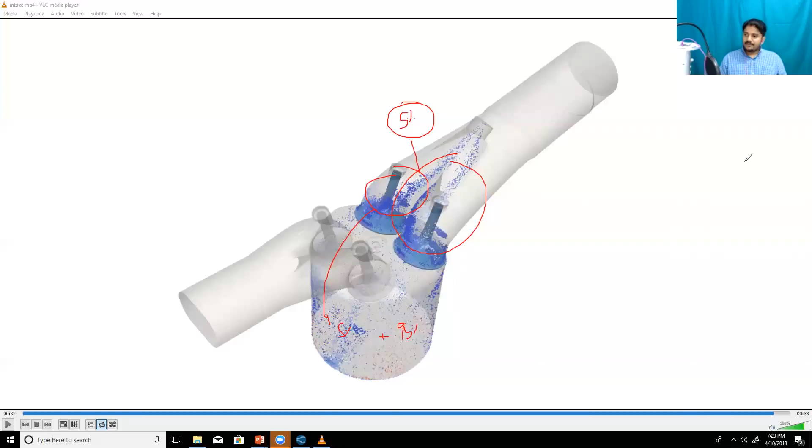Okay, perfect. All right guys, so yeah, we're almost at 1.5 hours, which is very nice.

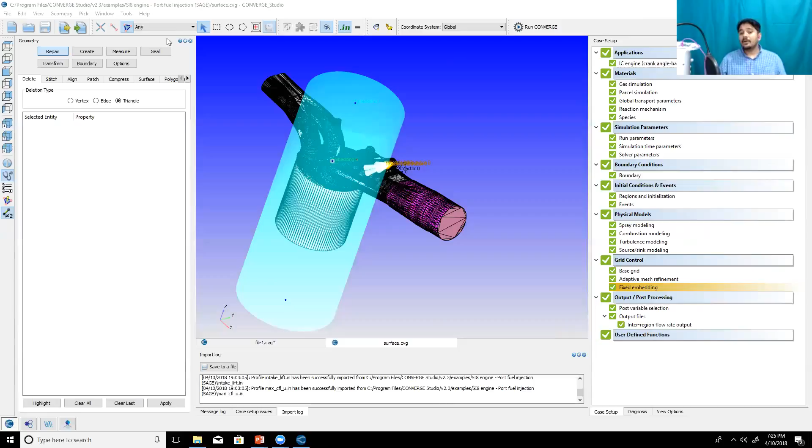That is a different concept. MPFI stands for multi-point fuel injection system. That means your injector has multiple points, meaning it has multiple nozzles. So in this case, if I hide my embedding, you can see I have 4 spray cones - these 4 spray cones are coming from the same injector. So this is a multi-point fuel injection.

So how to decide the mesh size for a simulation? That's a great question. The honest and most effective way to determine the mesh size is a grid dependency test.

Back when I was working for these companies, what we'd do is run the same engine with multiple mesh resolutions. There are some fundamental calculations you can make - in case of turbulence simulation using a RANS method, you can calculate something called turbulent flame thickness, and your computational mesh size should be on that order. Similarly, for your spray models, your mesh size can be calculated approximately using simple calculations. That is your starting point. So you use the starting point and keep refining your mesh.